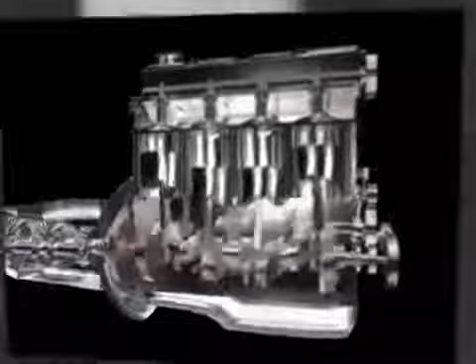Fuel, oil and lubricants, and their effects on combustion engines. Every time an engine is run, deposits are left behind, and these always have a long-term effect on the way the engine functions and its degree of efficiency.

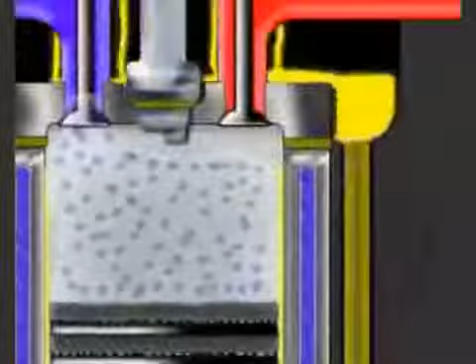In particular, compression is reduced as a result of sediment in the area of the piston rings, oil rings, and their grooves. The deterioration in the combustion of the fuel-air mixture resulting from this leads to a reduction in the engine's performance. As a result of this, there is an increase in both oil and fuel consumption.

This creates a situation where the sediment caused by the combustion process increases markedly, exhaust fume levels rise, and not least, the wear and tear on engine parts escalates.

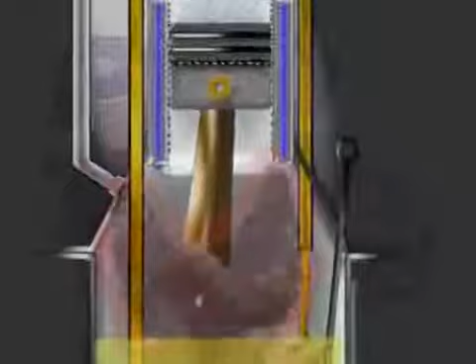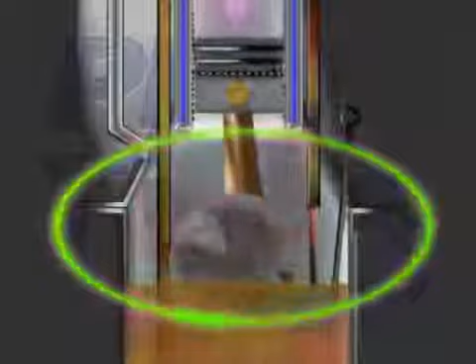Parts of the mixture and combustion gases evaporate in the crankcase and thereby accelerate the speed at which the quality of the oil deteriorates. And this can lead to problems in the crankcase breather system.

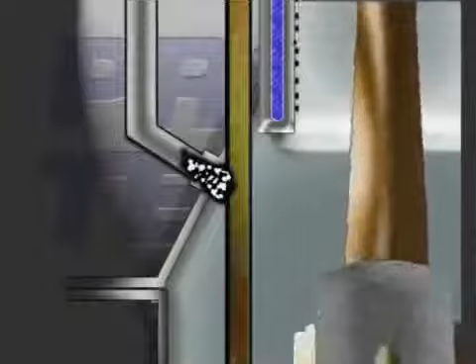Larger particles of dirt, such as the formation of resin deposits in the oil ducts, can trigger a reduction in the lubrication of important components, for example, the camshaft.

Are all these impurities removed by a normal oil change? To illustrate this, let us have another look inside the crankcase. The old oil is drained during the simple oil change process.

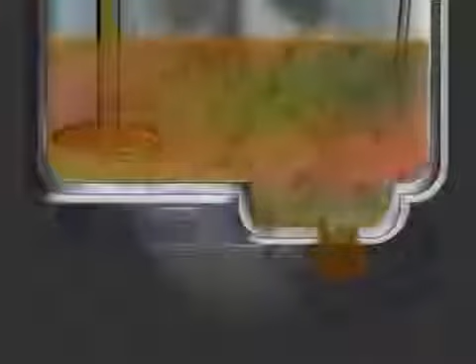However, not all the impurities caused by running the engine are removed when the old oil is drained off. Some of them remain in the form of deposits in the oil and the lubrication system.

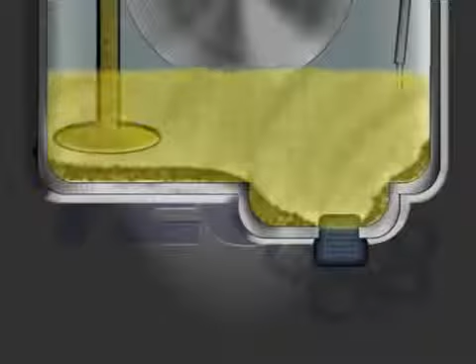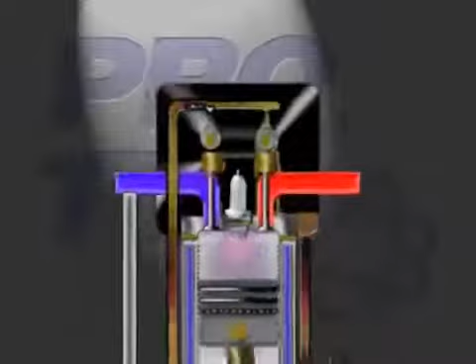Once the engine has been refilled with fresh, clean oil and is then started, the new oil absorbs the remaining deposits, and in a very short time, the oil is once again contaminated. This situation naturally has a negative effect on the efficiency of the new oil.

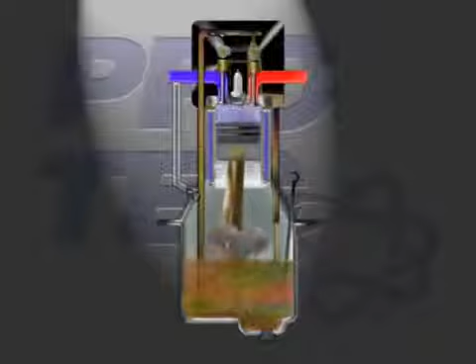In order to maintain both the performance and the economic efficiency of combustion engines, we recommend that the complete oil and lubrication system is cleaned before each oil change.

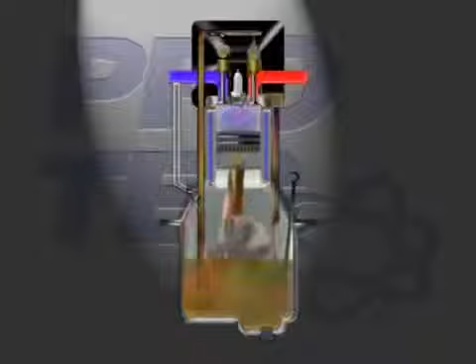After our cleaning agent has been added to the old oil, the engine is run in idling mode for 10 to 15 minutes. During this time, it releases all the impurities caused by running operations in very fine molecules, as shown here at individual problem zones.

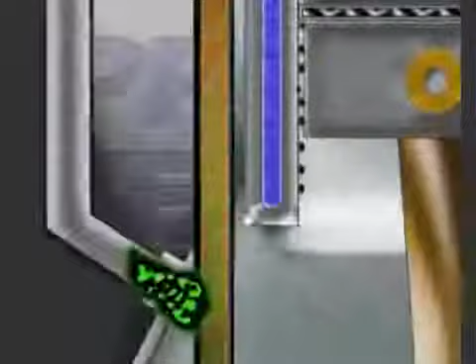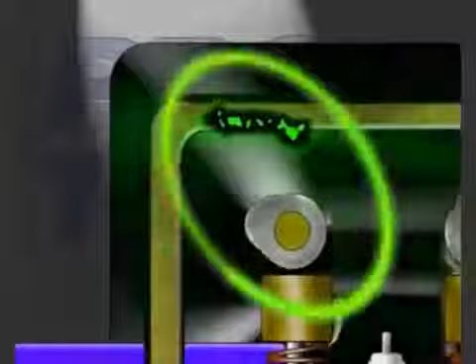In our example, this is the piston ring area, the crankcase breather area, the camshaft lubrication area. At the same time, highly efficient lubricating substances protect the engine during the whole cleaning process.

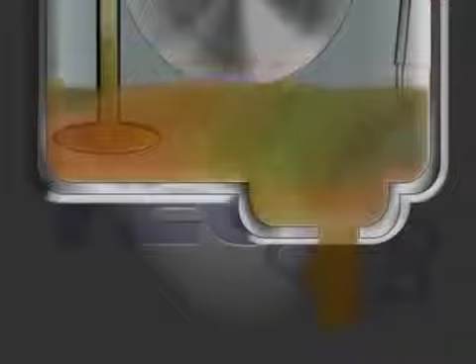Elastomers, such as oil seal rings and O-rings, are kept absolutely supple. All the impurities are now removed when the old oil is drained. This means that the oil and the lubrication system, which we fill with new fresh oil, are kept very clean.

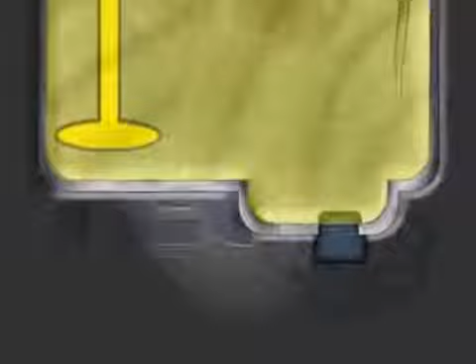Now, the new oil can perform to the best of its ability in a clean environment and fulfill the tasks required of it, such as lubricating, sealing, cooling, purifying, and keeping particles in suspense.

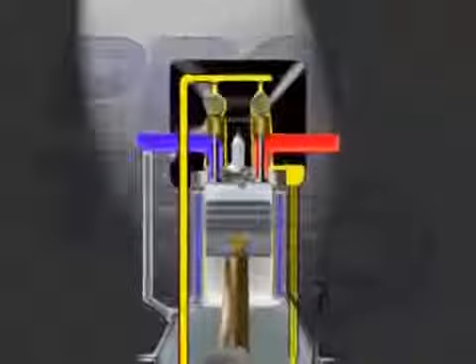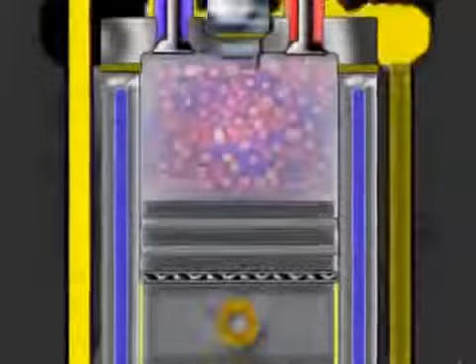The fresh oil is now able to absorb the impurities that have been newly created and is no longer limited in its ability to perform by the old deposits.

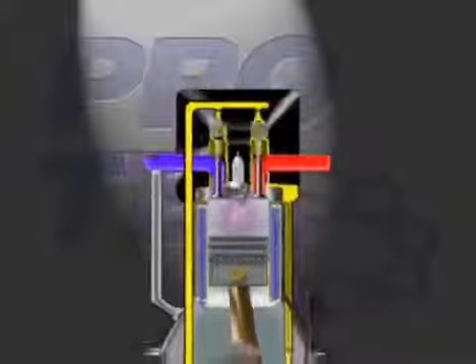As a result, we have new, fresh oil in a clean engine, the best possible oil and fuel consumption, improved engine performance, less wear and tear on parts, the lowest exhaust emissions, and a longer life for the catalytic converter.